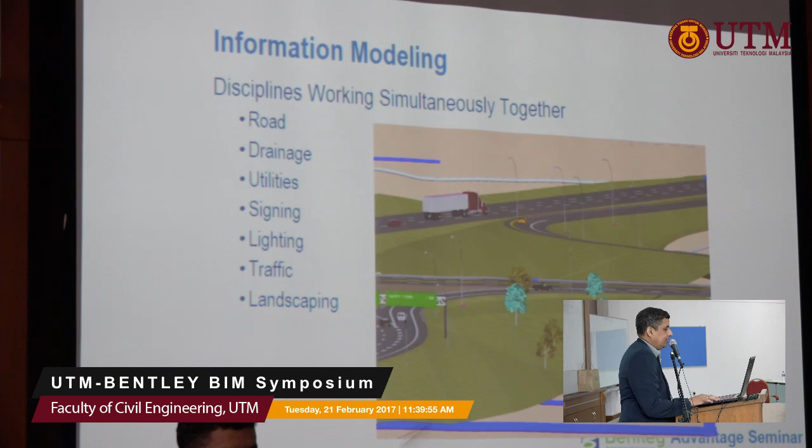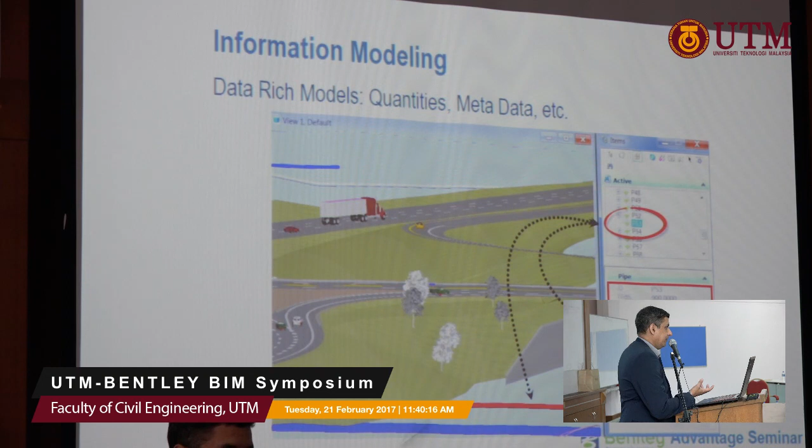So the key word that we like to talk about is information modeling. Now, when you actually look at a particular object, you have the relevant details: when is this road constructed? Who constructed it? What's the cost of that? When was this beam constructed? What is the grade of that beam? What does it use?

And the key word here is you need to collaborate everything together. BIM most of the time works with many offices, many companies, many different skill sets. Managing those requirements under BIM is also a challenge, and what we call here is collaboration. So you need to collaborate all this information when you work with BIM. In order to deliver BIM, you have the software, you have the skill set of people, and you need to manage your resources as well. So it's a whole process.

It's not only that if you know Revit, you are already BIM — no. In BIM, we have different definitions. You have a BIM drafter, that means you just draft using CAD, whatever tool, whether it's Bentley or Revit — you call that a BIM drafter.

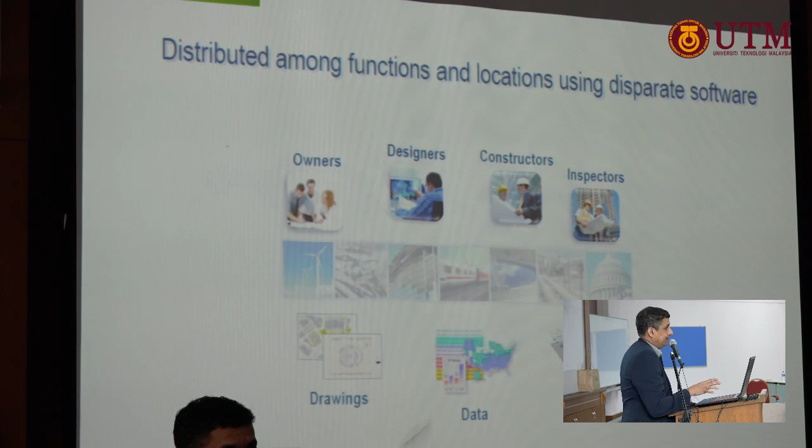So in order to actually understand BIM, you need to be part of that team. You need to be part of the workflow.

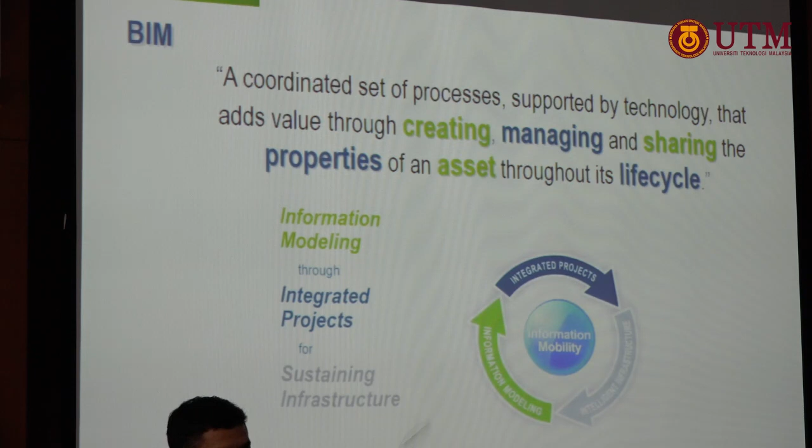So coming back to all this process I've shown you, BIM, as we understand it, is a coordinated set of processes supported by technology. Technology can be anything - it can be Bentley, it can be Revit, and so on - whereby you use the technology to create, manage, and share. That means if you're a structural guy, once you've done your sharing with the MEP and so on, the whole process is to bring it to the asset lifecycle. Who's going to use it at the end? The owner-operator. The owner-operator is going to use BIM for maintenance. That's the whole purpose of BIM.

So this is where Bentley comes in. Bentley's strength, as I said, you see at the bottom here: information modeling through integrated projects, for sustaining infrastructure. So the whole set of suites that you've seen there basically work with these three concepts.

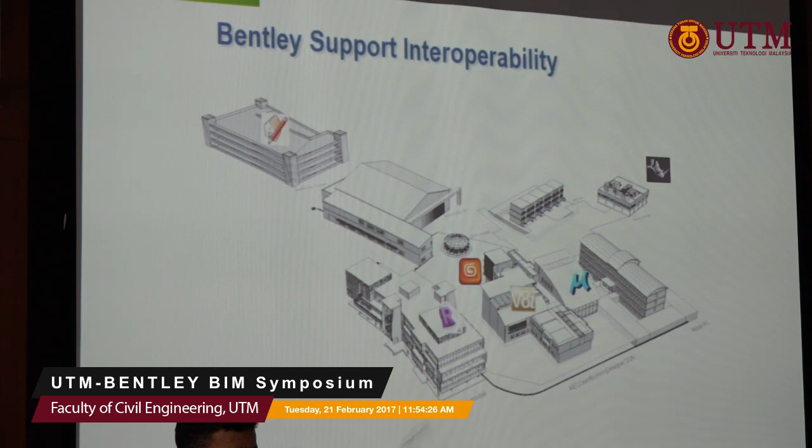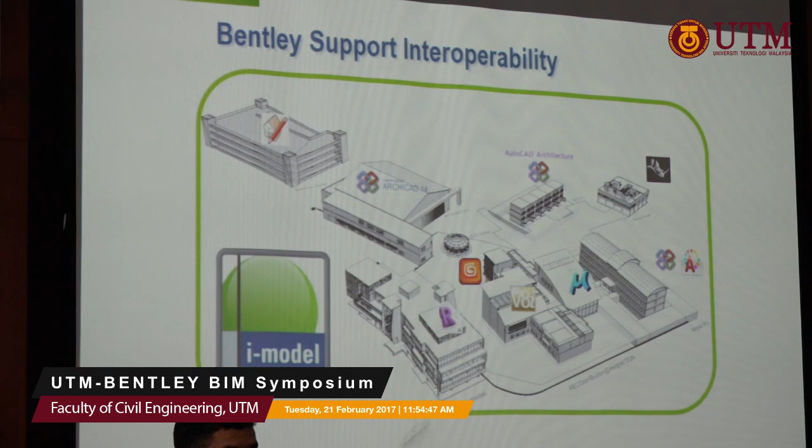Now another thing about BIM is, in industry, you're actually working with many formats. There are guys working with Revit, there are guys working with CAD, there are guys working with Bentley. So one thing about Bentley software - it is interoperable. We can work with any software that you have data in. If you have data in Revit, we can work with that, we can bring it in, not a problem. If you're working with ArchiCAD, we can bring the data in. So we work as interoperable.

Another way of working with BIM is what you'll hear called Federated Information Model. When you do BIM in a big project and put it in one single file, the size of files becomes too huge to model. Even if you want to open it in your project, it becomes too complicated. How do you expect a guy at site to open it up on an iPad to construct it? There's no way you can actually do that. So the BIM that you show is only going to be residing in the office.

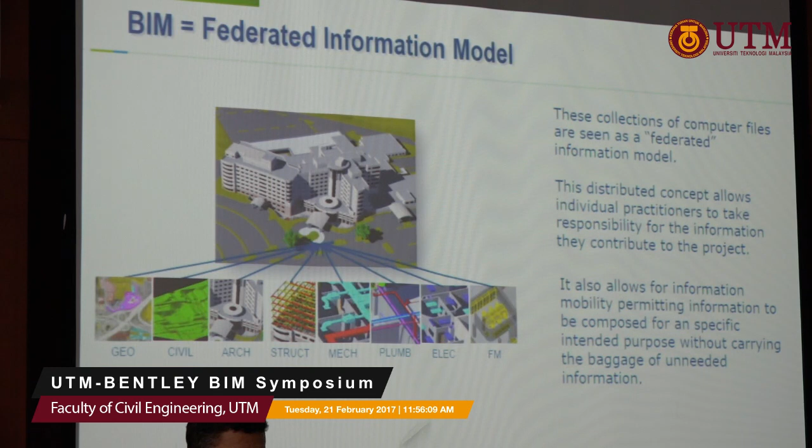So in order to overcome that, the federated approach has been recommended, whereby we reference only those information that's required to form a BIM. So if the guy is going to do structural, he just needs to get and reference and look at the structural component that he wants to construct. So it's lighter and easier to look at, but it actually consists of the whole integral project. So it's not isolated - it's still integral for the whole project, but the way it's being worked is the federated approach. And Bentley supports those kinds of workflow.

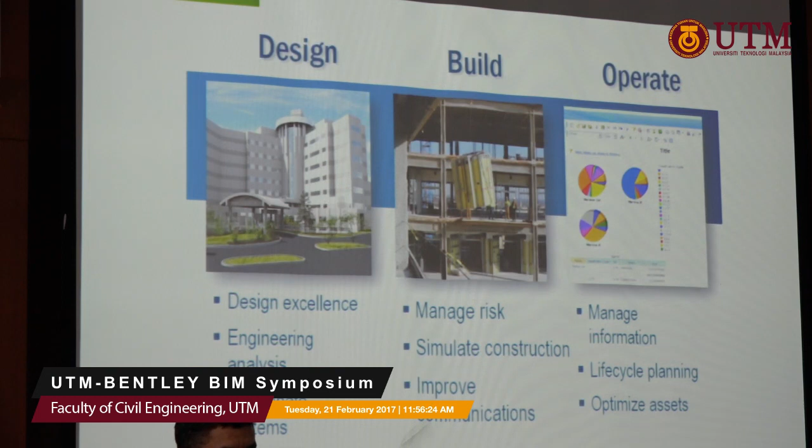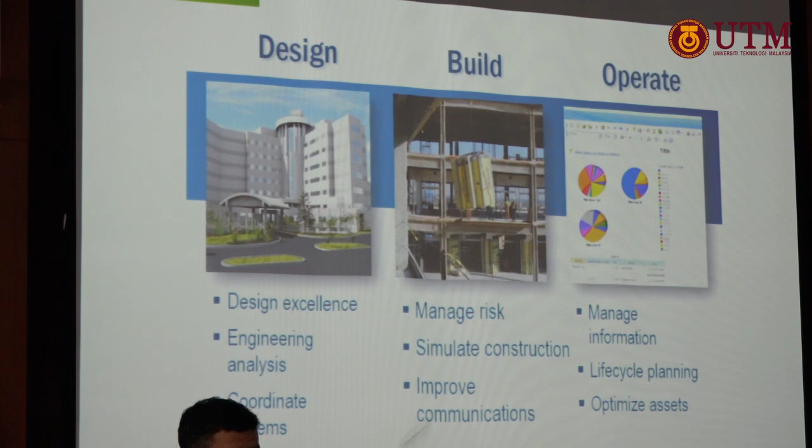Generally, if you're talking about the industry, the way the industry works, you can look into these three categories: design, build, and then operate. So these are basically where all these solutions will be playing around. Bentley covers from design to asset lifecycle, which is the operational phase. So you can see there are many Bentley software that work in all this area.

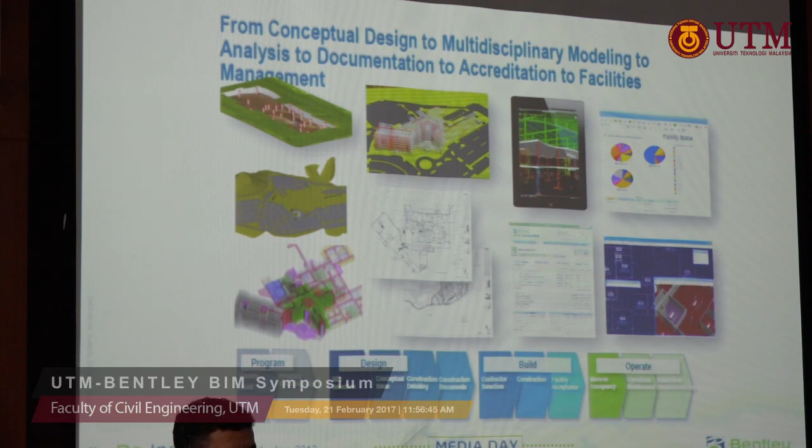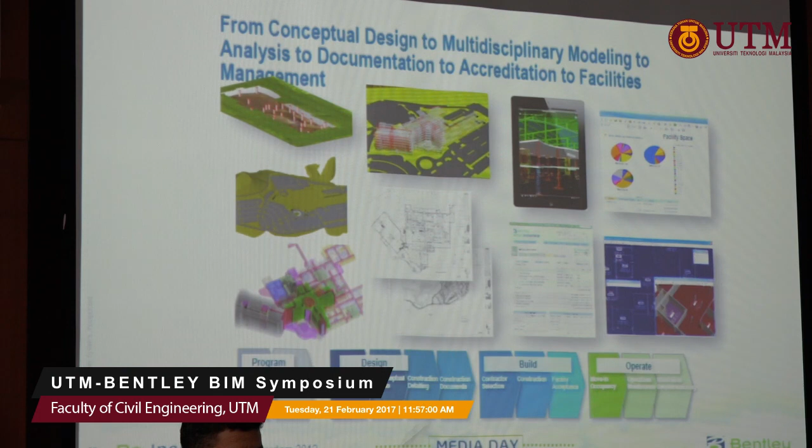So if you're going to do concept, there's a concept solution. If you're doing infra, we have what Mei Lin has shown you - what was the software for concept? Concept Station. If you're doing building, there's another software called OpenBuildings, just for concept. If you're doing detailed design, there's OpenRoads Designer, there's OpenBuildings. If you're moving to site, there's Navigator. So many software you have.

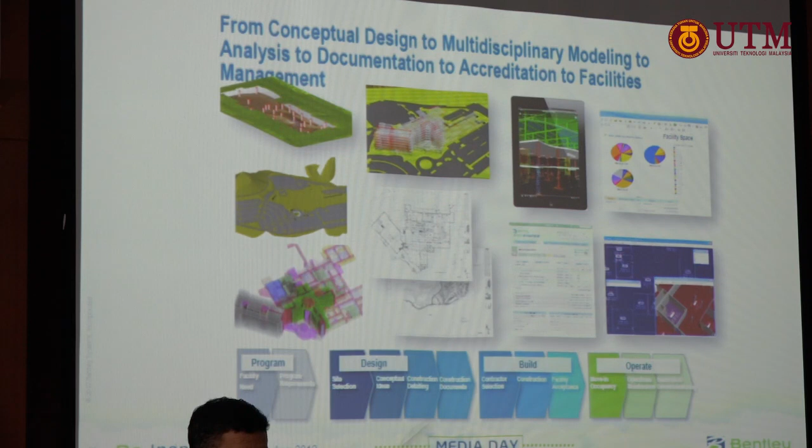So just a bunch of it - if you're doing GIS concept, we have Bentley Map, in 3D. Singapore is basically doing 3D GIS now, using our software for the whole country of Singapore. And then you have OpenRoads Designer, you have OpenBuildings. This is the first time you're hearing about Bentley OpenBuildings, which I'll share with you more later.

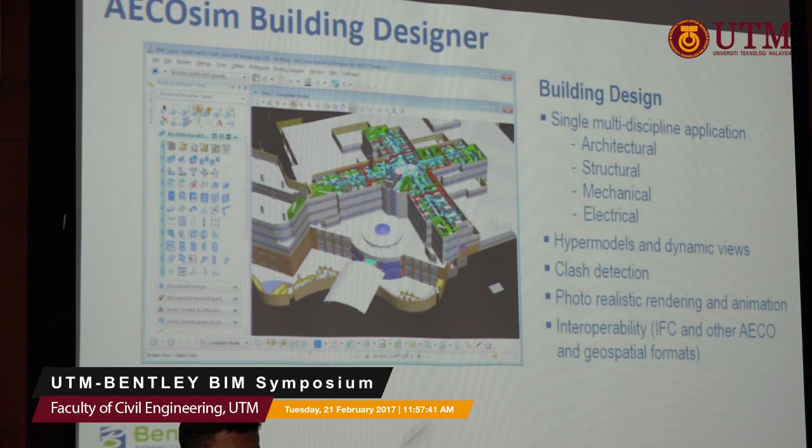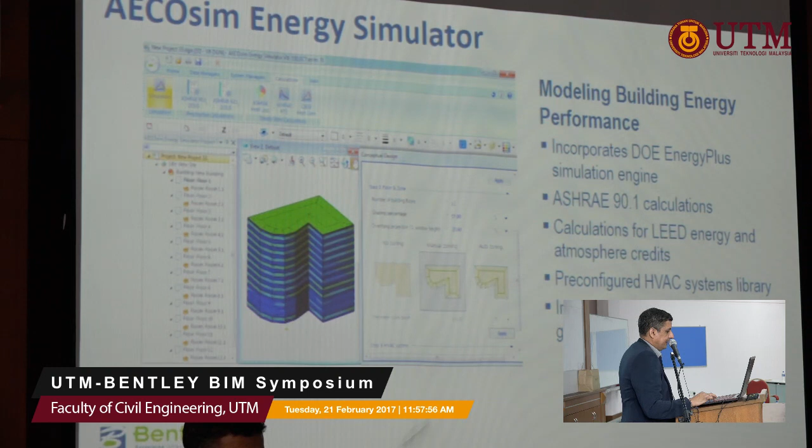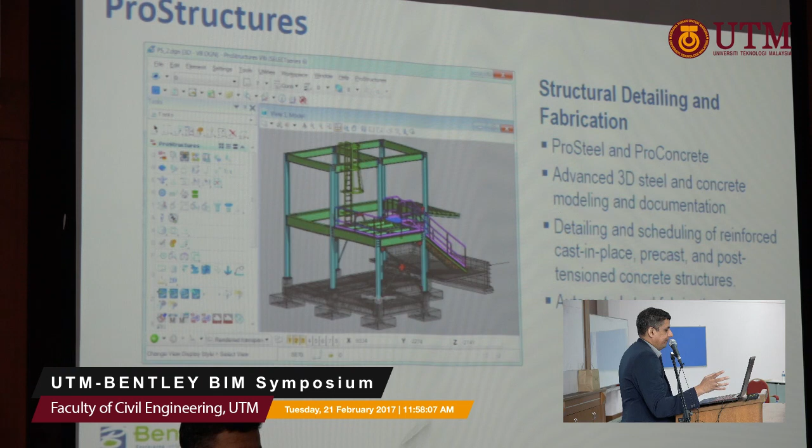Generative component, this is a very interesting option to consider what-if scenarios. You have the AECOsim green building, we call it energy simulator. You have a lot of MEP capability in here. And then you have ProStructures where you want to do detailed modeling of steel, concrete, all those things. You can actually use this kind of software to do that.

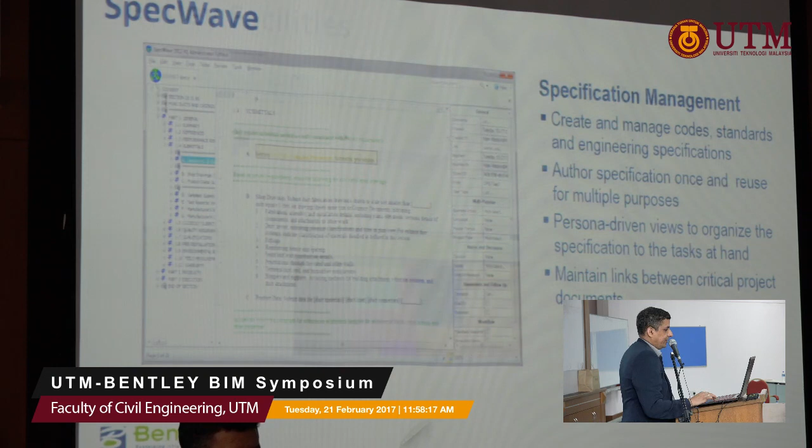An important part of BIM is also specification. Bentley SpecWave actually manages all the specification accordingly, and Bentley Facilities manages the asset lifecycle information. And Navigator, as I mentioned, you can bring it onto your mobile app, whether it's Apple or Android system.

If you go to Google Store and type Bentley, you should see Bentley Navigator app there. There are a few apps you can download and install. The model, basically, you can bring in from the desktop by using Dropbox. Bentley does have its own collaboration software, ProjectWise and all those things. Maybe you do not have access for that, but in the meantime, if you have your model on your desktop, you can bring it into your mobile by using any Dropbox capability.

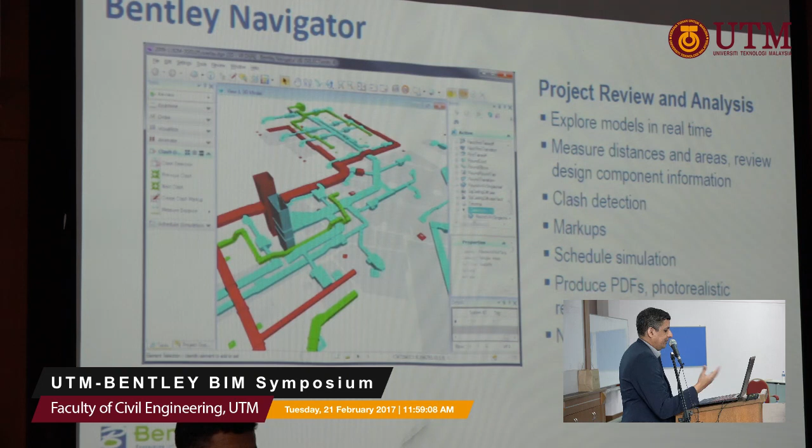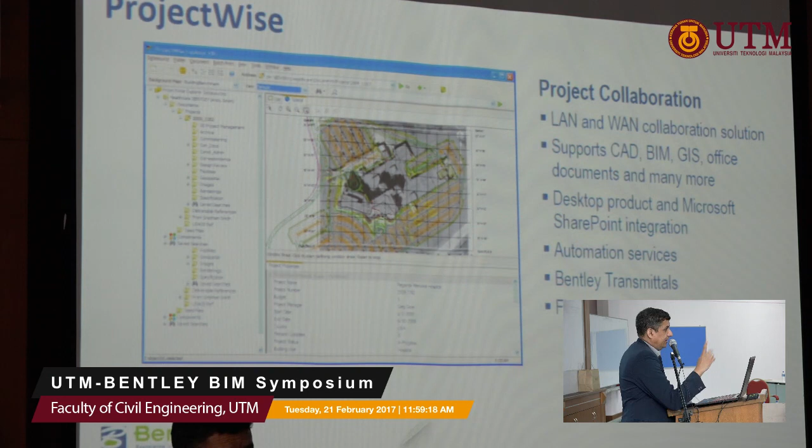And then this is ProjectWise, one of the main software used to collaborate. The MRT Corp, MRT project that you're seeing, they are basically residing on ProjectWise.

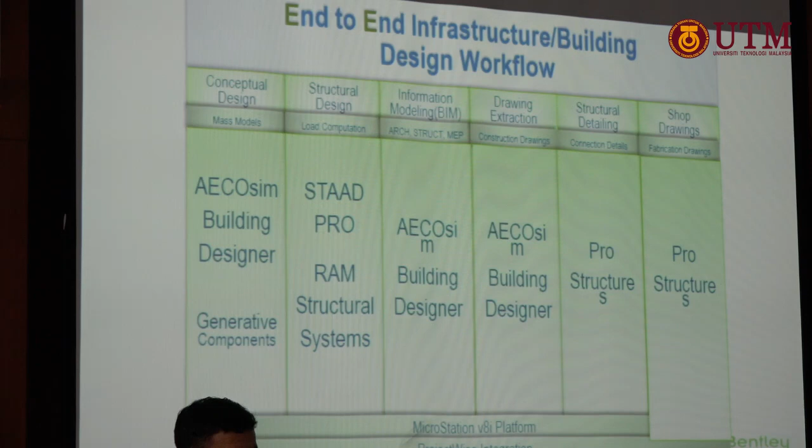Now, if you look at design construction for a typical building, in terms of Bentley solutions, you have AECOsim, which builds up your building information. So you get some structural software, STAAD. Have you used STAAD before? STAAD Pro? So you're already on Bentley.

Unknowingly, you are using Bentley software. STAAD Pro is already part of Bentley, it's been there for a long time. You may not know the brand. STAAD Pro is used for the analysis in AECOsim, so you can integrate all those things. AECOsim is the BIM software under Bentley, and then you follow up with Pro Structures, which is used to do the concrete and steel detailing and information.

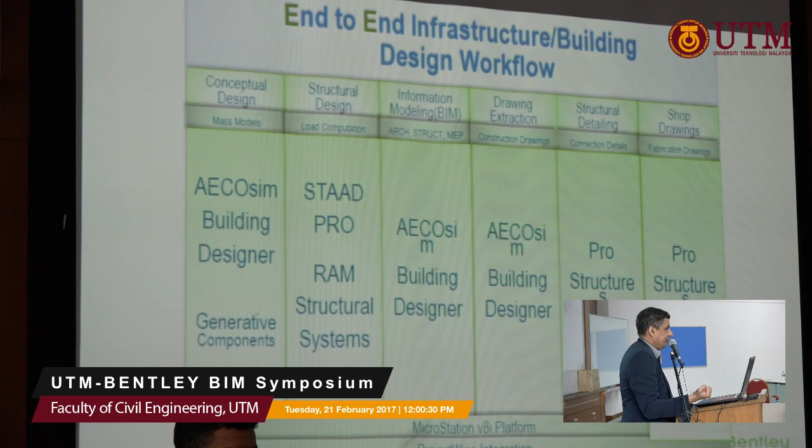This is a typical workflow if you are doing buildings. And at the bottom is ProjectWise, which will integrate all this information. Whether you are in the same office, same campus, or a different campus, different state, ProjectWise will integrate all this information together.

So multidiscipline building documentation, this is where AECOsim actually resides for Bentley. Whether it's site, utility, roads, architecture, MEP, and many things, even tunnels, is done in AECOsim. AECOsim is not only for building, it is for any infrastructure projects that you want to do.

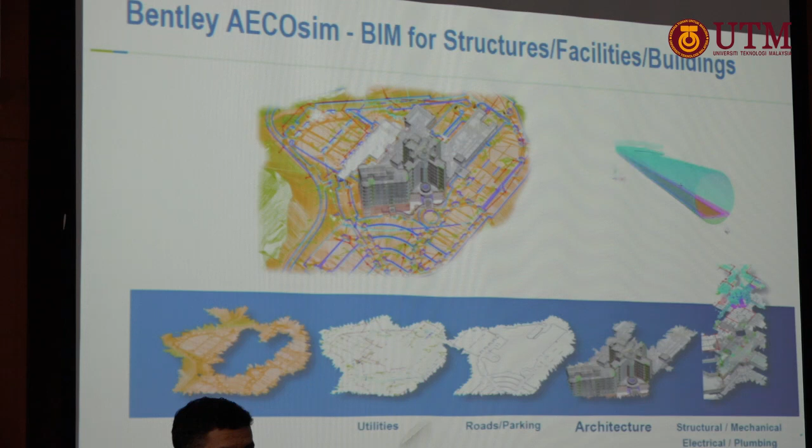I understand that if you're talking about Revit, a lot of people know how to use Revit. It's straightforward building information. But if you're going to do horizontally spread building, AECOsim provides much more versatility in that. If you're going to do geocoding, geographic information, one thing Revit can't do is geographic locations. AECOsim does that easily, and many other things too. That's why it's being used widely in infrastructure projects compared to just buildings.

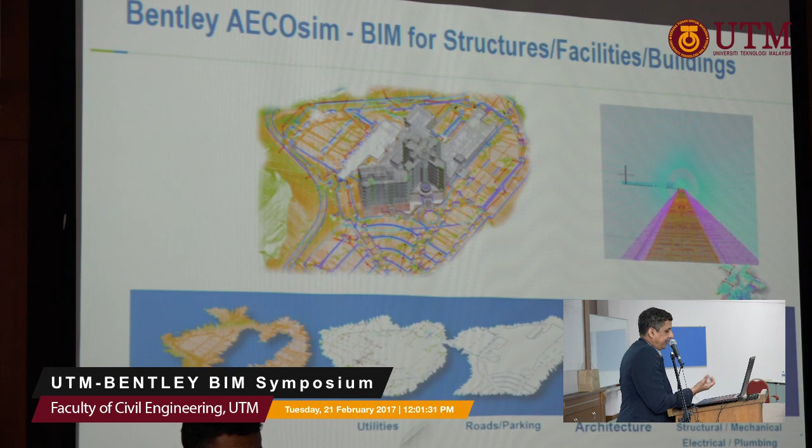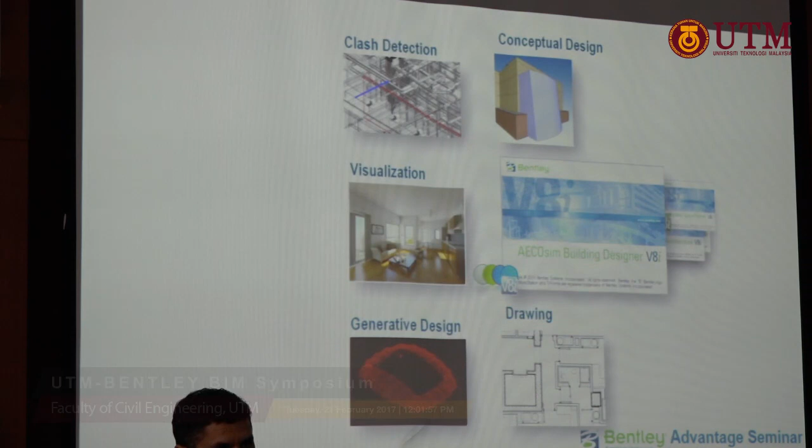Widespread usage of BIM for Bentley. AECOsim brand starts from architecture, engineering, construction, operations, simulation. That's where AECOsim comes in, and it's just one solution. You have the mechanical, electrical, everything in one, from concept to complete drawing production.

So when you're talking about data integration, it's easier, and it resides on MicroStation. MicroStation is the CAD, so it's easier for you to manage this information as well.

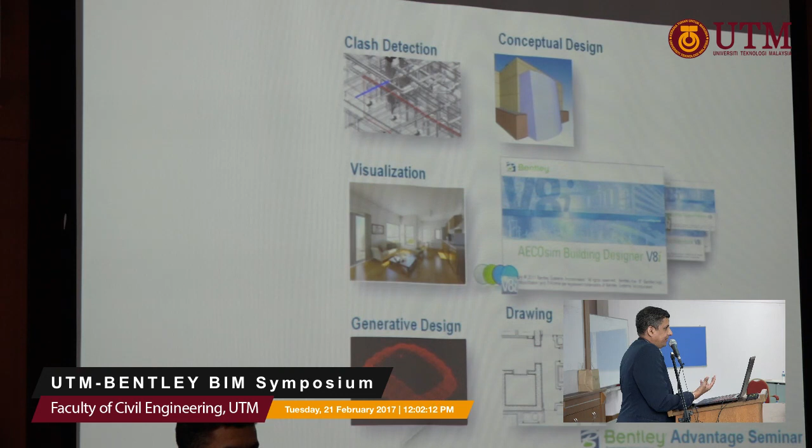So you have all this information, you can actually do coordination, clash analysis. Basically, the key important thing about building is once you do that, you need to do clash coordination, everything. AECOsim does that quite easily. If visualization is important, fine, you can actually produce great visualization from AECOsim as well.

And then you come and produce all this detailing, produce the analysis. Analysis can be done using STAAD Pro. So from AECOsim, it goes to STAAD Pro. Whatever model you have done in AECOsim, it goes to STAAD Pro. You can analyze that, optimize that, and then update that information in AECOsim.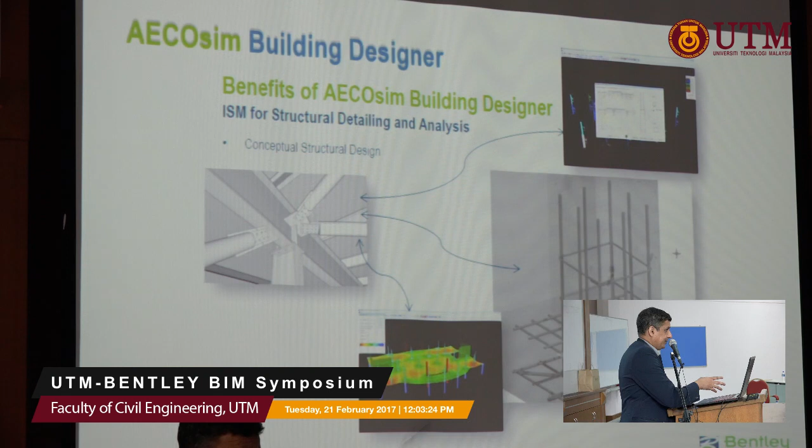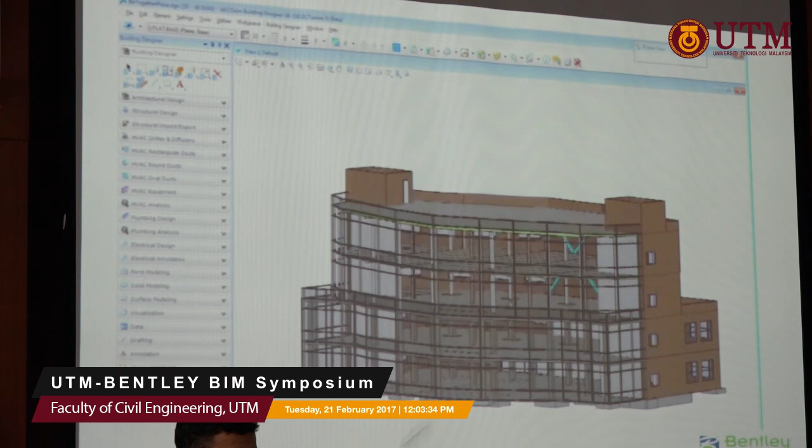All right, this is just a short video showing you the model of the software in AECOsim, showing how the information is being transferred.

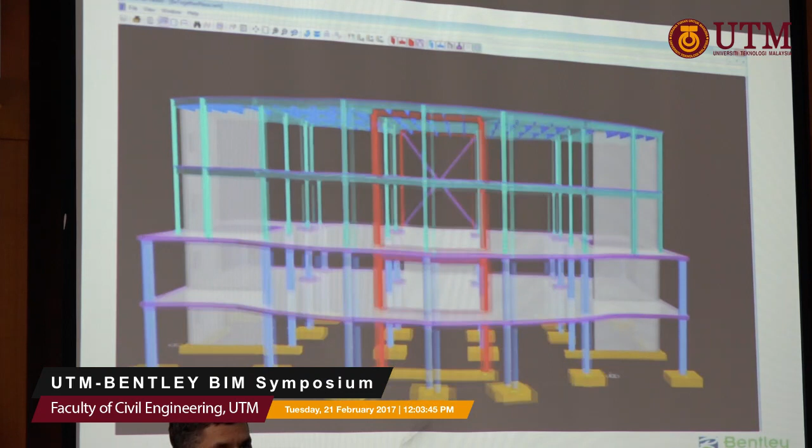Now, another software you should be familiar with is RAM Structural Concept. It's also part of Bentley, and you should have access if you're doing post-tension buildings and all those things. RAM will be another software in addition to STAAD.Pro that's good for you to understand. It's used quite a lot in the industry, but its strength is basically in post-tension building design.

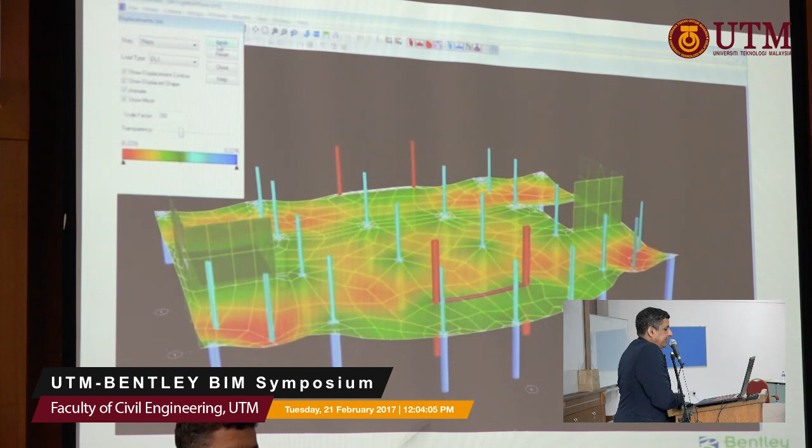So what you see here is basically doing the analysis, finite element assessment on the floors. You can come up with detailing, and then bring it back to AECOsim.

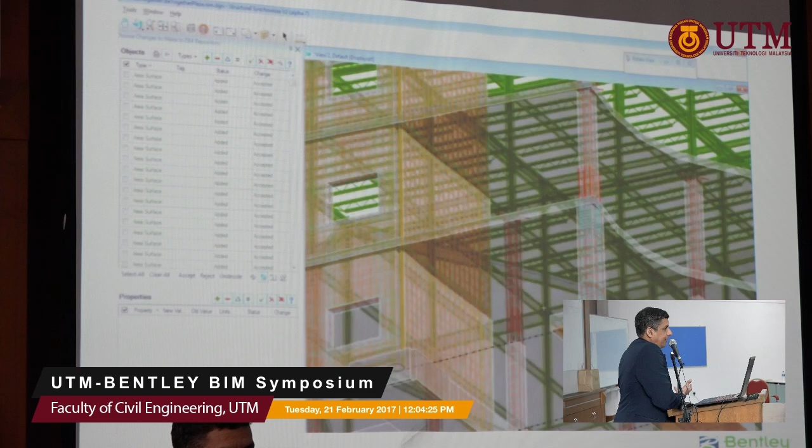And then you have all this reinforcement information created in AECOsim automatically, so you do not need to create it manually. Creating reinforcement is a challenge - if you're going to draw each reinforcement in a beam, it's going to take a long time. By using this integrated approach, it's easier to do that. So everything is in one environment, called AECOsim.

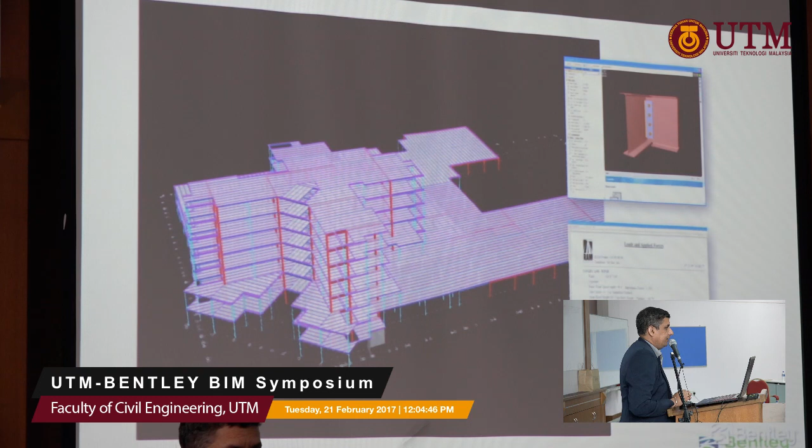Plus steel connection design as well. If you're doing steel, all the connection design you can actually produce in AECOsim.

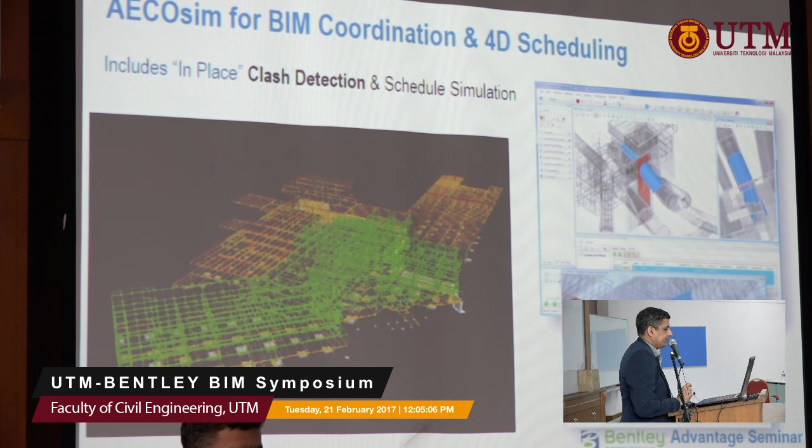So another important part of AECOsim is BIM coordination and 4D scheduling. You can schedule that information in AECOsim by linking it to project scheduling, whether it's Microsoft Project or Primavera - whatever, you can do that in AECOsim. And again, moving to clash.

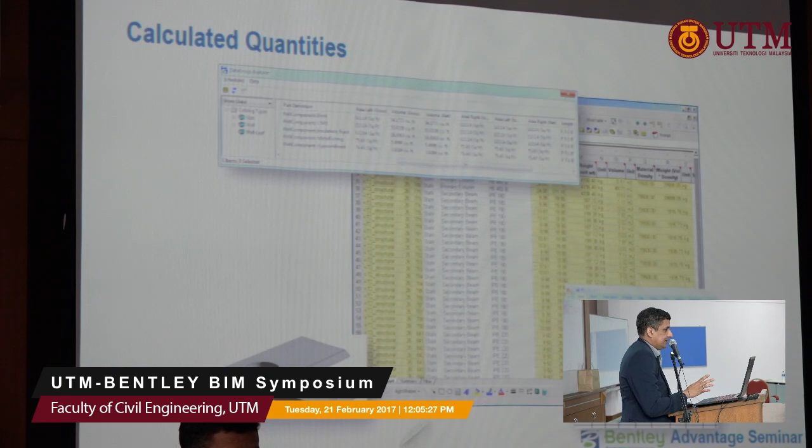Another important thing about Bentley software is hypermodeling. Hypermodeling is good software whereby you can represent 3D information and 2D drawings in 3D space - it's easier. And then you have all the quantities and all the stuff.

And you have MEP, the HVAC system - you can model that accordingly.

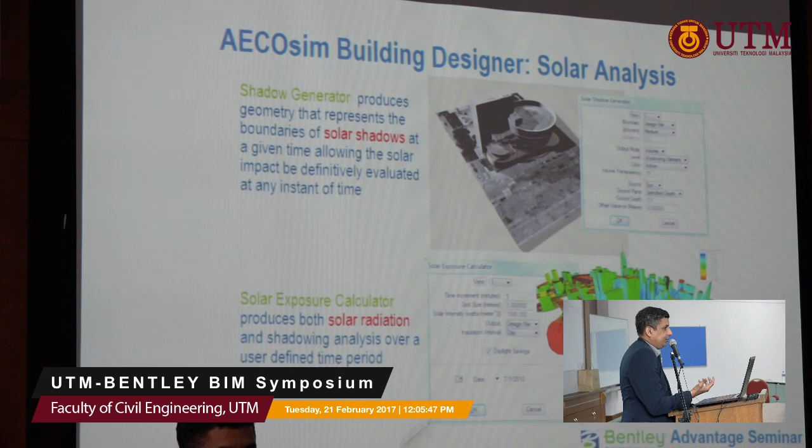Now, if you're going into green building - green building has become one of the important aspects of building design, and AECOsim provides the capability to do green building analysis. So a simple analysis like solar shadow and solar exposure, you can actually do everything in AECOsim.

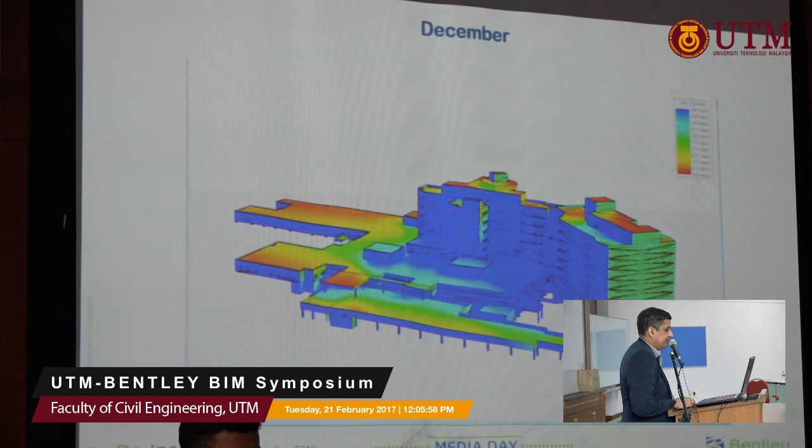So you can actually see when this information is building - you have different levels of exposure, and you can do that.

AECOsim, as I said, consists of many capabilities. One of the capabilities is point cloud. Have you heard of point cloud before? No? All right, it's a different type of survey.

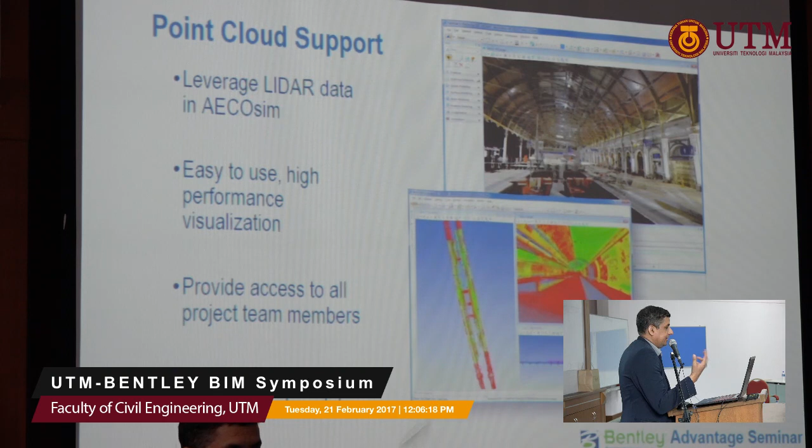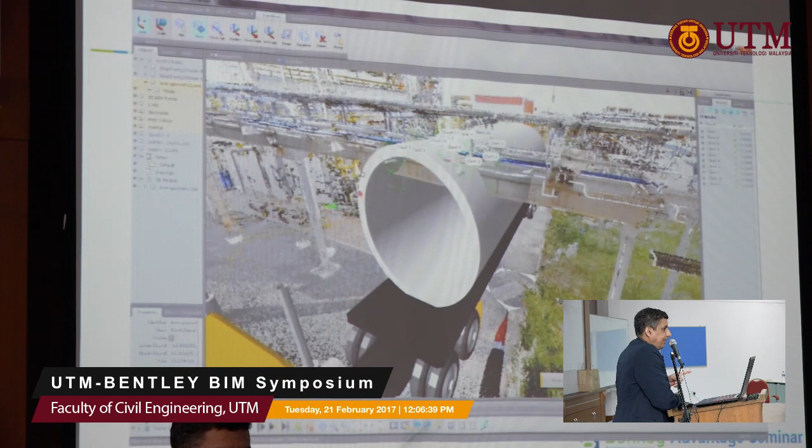I'm just showing you this video here - you can see this is a survey of points in a building. So if it's an existing building, for you to go and create a BIM model becomes a challenge. So you have a laser scanner that shoots up millions of points and measures the exact location where the component is located, and then you can create a feature of your objects.

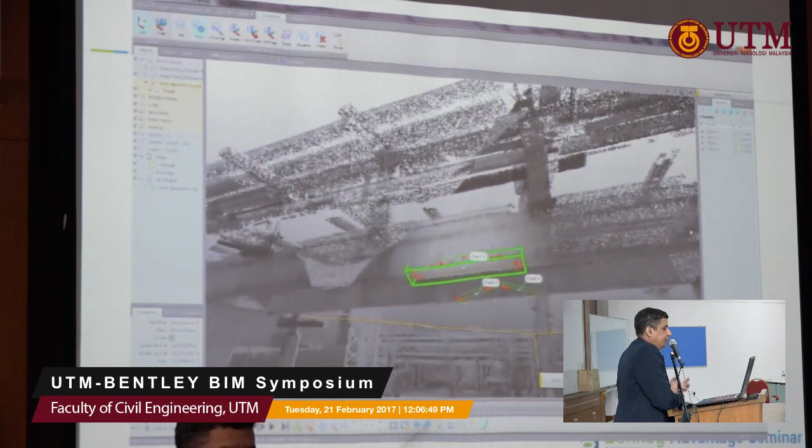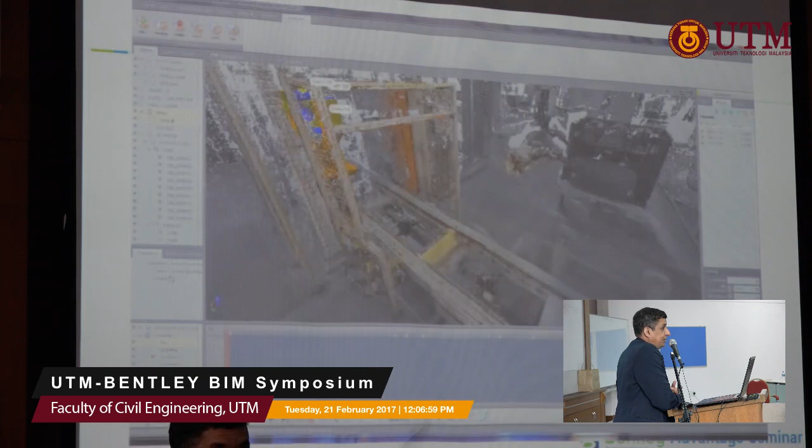It's being used quite widely in buildings, oil and gas companies. So instead of you going there to measure, point cloud takes much shorter time for creating a BIM model out of that. And then you can perform any kind of clash detection with the point cloud as well.

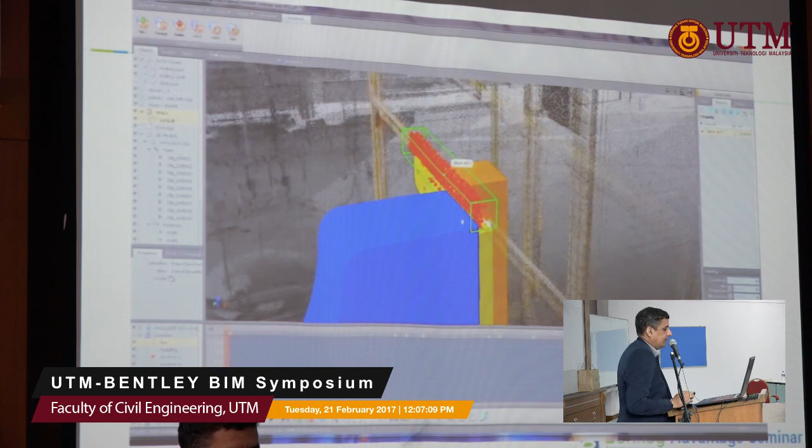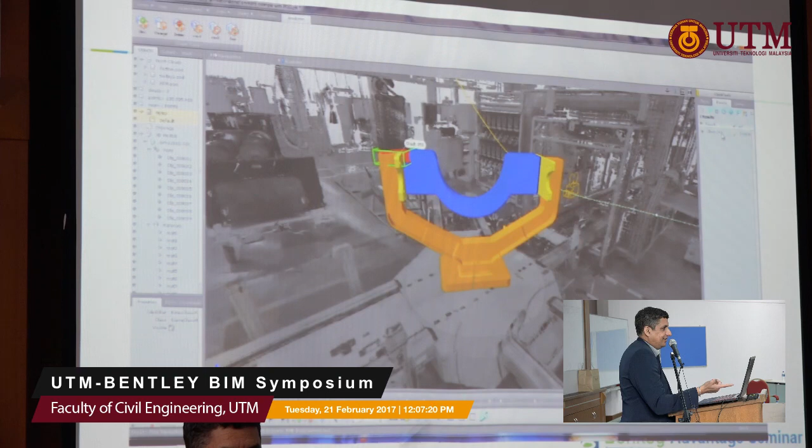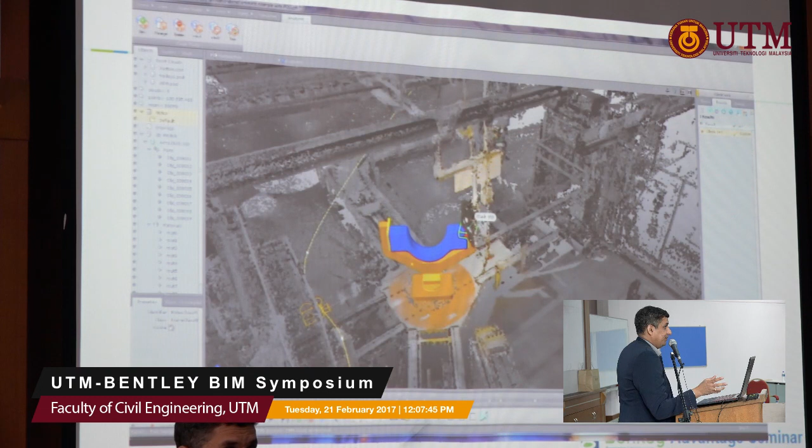So technology has moved forward. Earlier you have this conventional survey, then you have LiDAR, then point cloud, and now another term being used - context capture - whereby converting 2D photographs to 3D. That kind of concept is also being used in survey now, because you can get an accuracy of plus minus less than 3 centimeters. So it's quite good for initial purposes, but you can improve that to plus minus 1mm if you need to by incorporating some point cloud data together.

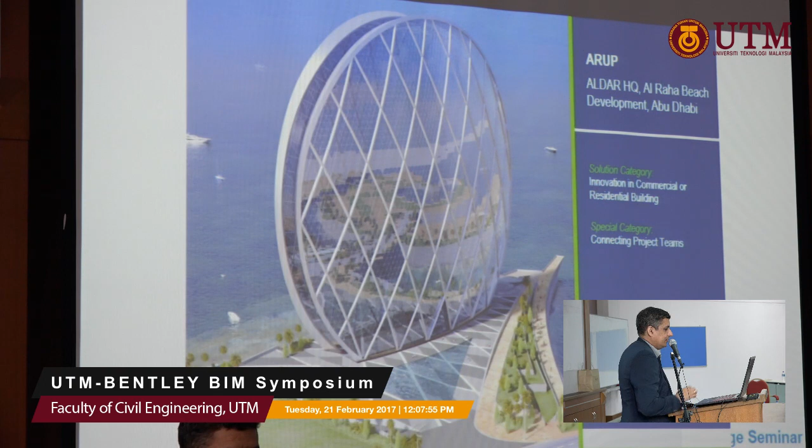So some projects being done overseas, that's kind of motivation for you. This is Arup's projects in Abu Dhabi - they are very innovative in their ideas. There are many projects being done overseas using Bentley software. This is the Ferrari-inspired theme amusement park.

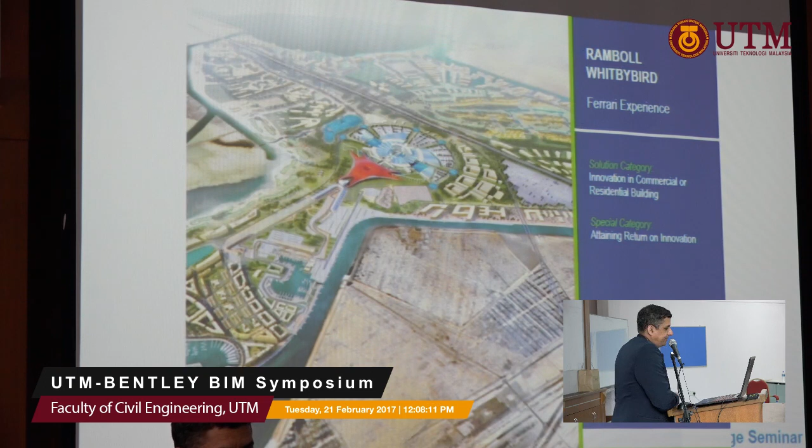So buildings being done by using AECOsim. If you go to YouTube, you can actually see all these case studies - there are many case studies being done.

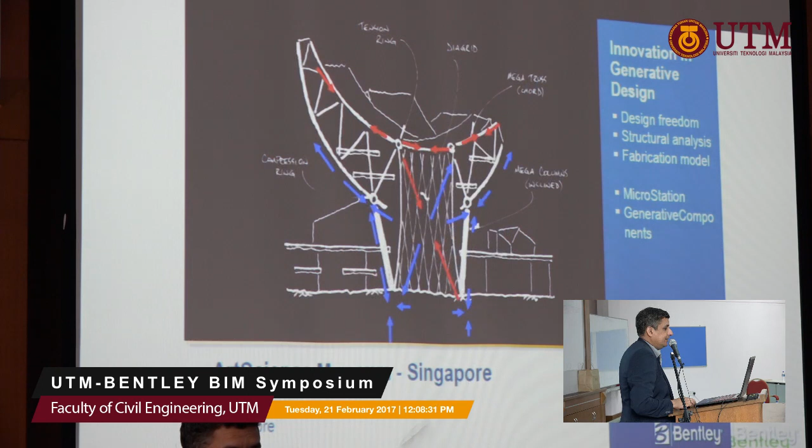Singapore, you should see that as well. It's also done in Bentley, but nobody knows that - it's been done in Bentley software as well. Construction and implementation.

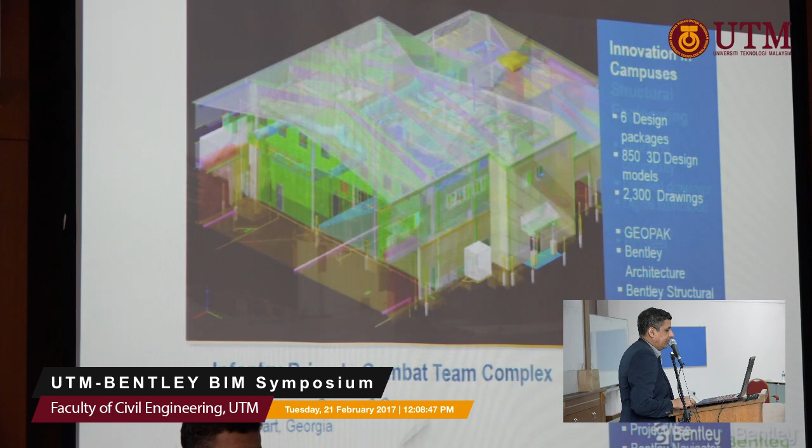And as I said, utilities - again, these are BIM projects being done overseas. So there's a lot of information that you can actually do.

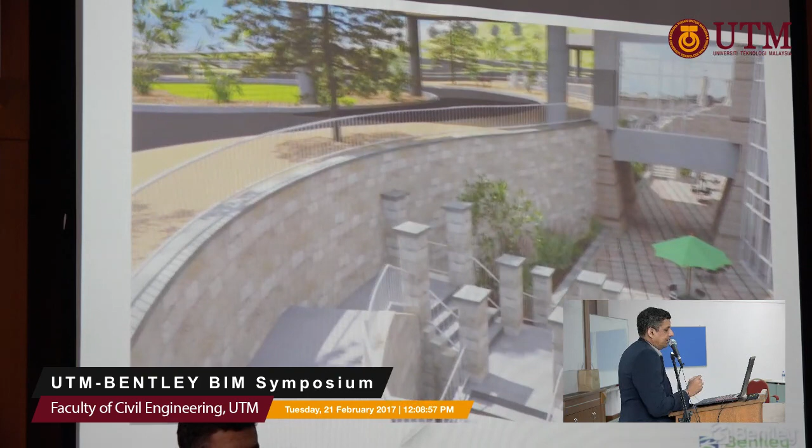Now, if you're interested to look at the final output, AECOsim does provide this information as well directly. You can do visualization, animation, all those things from AECOsim itself, without using any other tool.

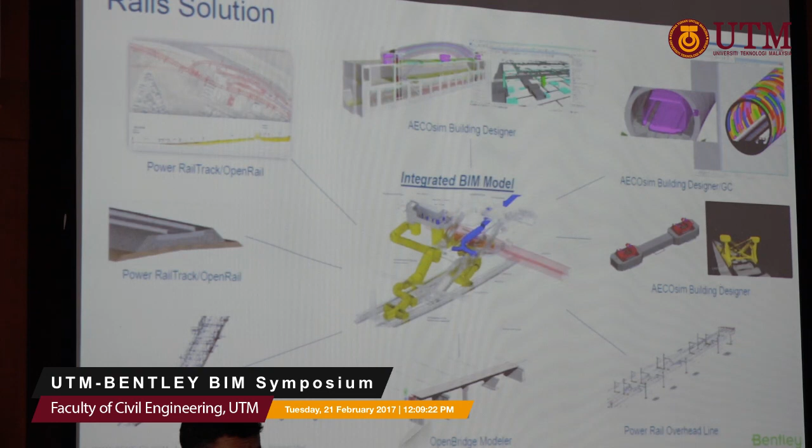Now, as my colleague has shown you, Bentley is not only that, you can actually incorporate it in the system. So AECOsim as well works in that area. As I said, if you're doing tunnels, if you're doing substations, AECOsim does play an important role in that area.

So all this tunnel information, the fixing, the attachment, the MEP component is all done in AECOsim. Similar to the tunnel in KL, it's being done in AECOsim, as well as 3D utilities, so you can manage all those 3D utilities accordingly.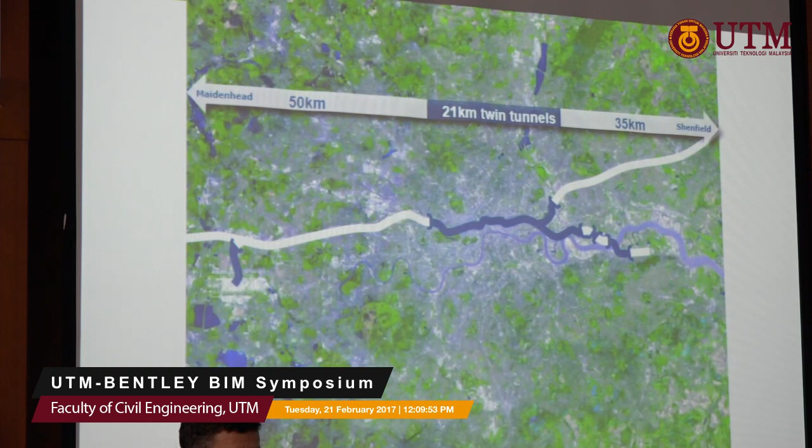One of the big projects we did was in London. So you should know the Crossrail information, done in a 21-kilometer twin tunnel. So it's also done by using Bentley solution.

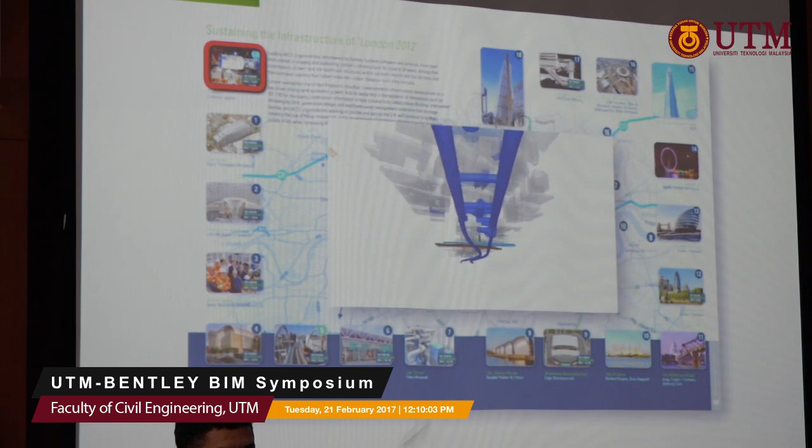Of course, Crossrail is a very complicated process. There are over 100 companies involved, and integrating all these things together is a challenge. So that is a very big BIM challenge, and Bentley plays the most dominant role in that area.

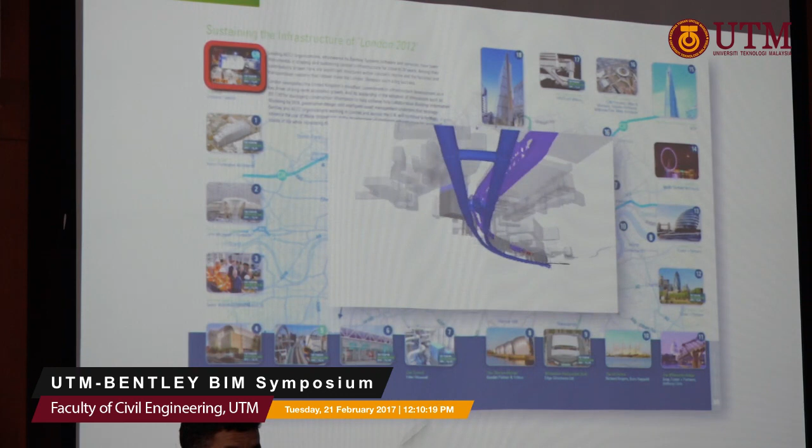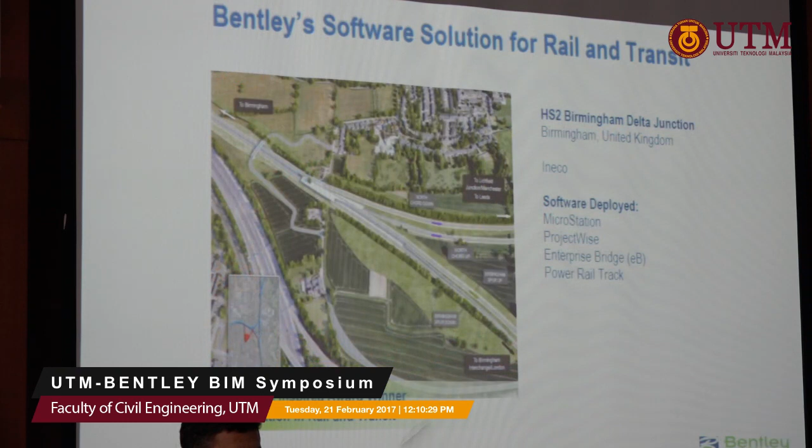Again, if you read about Crossrail, you also understand the software being used for that project. So there are many projects, whether it's road or rail, where Bentley has actually played an important role.

As Meilin had mentioned, there's going to be, this is something I would recommend if you have time, to be there in Singapore. This is the first time actually they're having it in Singapore, in Asia.

A lot of the time we have what we call a global conference where users come down to that location. It's always done in UK. This is the first time they're doing it in Singapore.

If you have time, I would say make time to attend that. You will basically meet up with all the international users, all international companies. You also get to understand the key guys from Bentley and solution providers who will talk about actual case studies, how to implement, basically exposing you to where Bentley is in terms of product. So it's a good opportunity.

Now, another key important thing when it comes to BIM is, it's not only the design you do in an office, you need to bring the design to site. If you can't bring your information to site to be constructed, then the purpose of BIM is just for coordination, it's not going to be used for construction or asset life cycle. So it's very important to look into those areas as well.

So Bentley actually provides ProjectWise to help you do that. It's being used quite widely in the industry. So information mobility is important, that's the reason why I said a federated approach actually helps in transferring information to mobility.

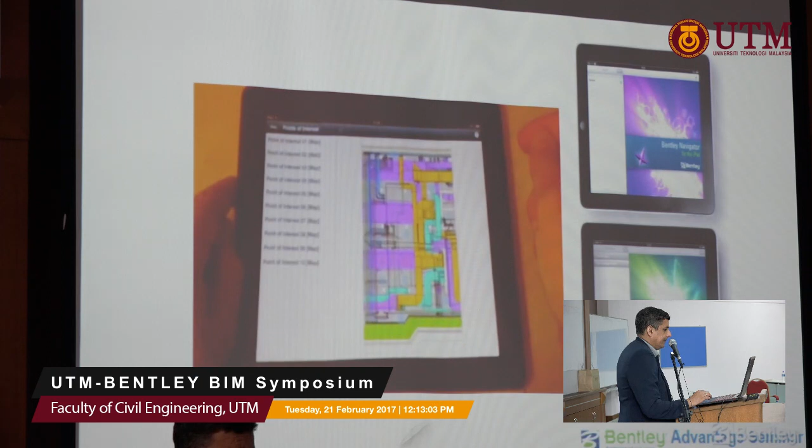So you have all this information, you can bring it onto your iPad and do any kind of clouding, and you can actually share that back with your design office. So you can put comments and all those things directly into your system.

So the model can be transferred, as I mentioned, using Dropbox or whatever. It can be shared back to your office through Dropbox if you need to, but the keyword we use is Bentley ProjectWise to do that.

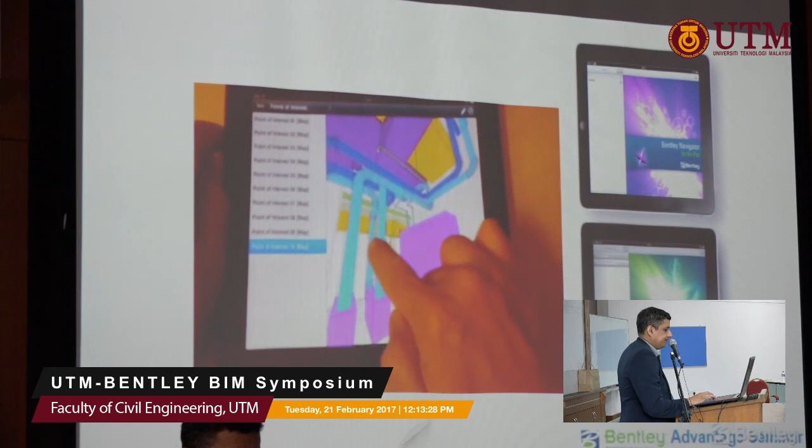Now, this is what I'm saying, we have a simple example here: a person who actually has a mobile, and a person who's on desktop. So Bentley can actually connect them together.

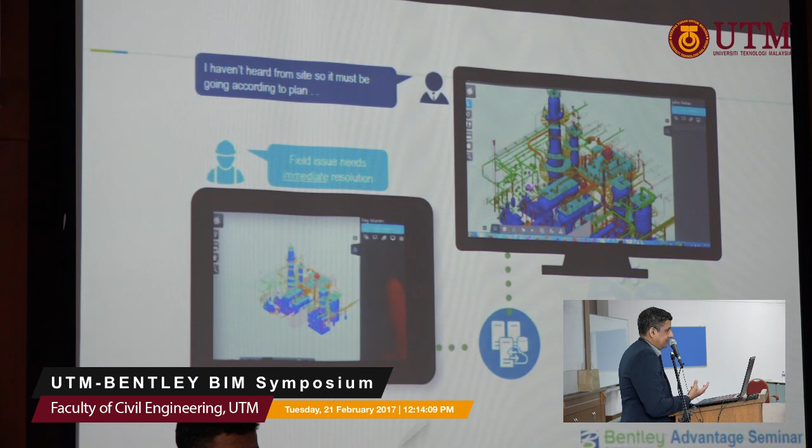The person in the design office is able to view the same model as compared to the guy viewing the model on site. And you can actually chat with the guy in the office and provide any comment that you need. So those are information that you need to integrate when you're actually moving to construction — information mobility.

Another important thing about Bentley is, in addition to hypermodeling, we can actually do augmented reality. Now we're talking about VR, virtual reality, bringing it to site. Bentley is moving forward with augmented reality, meaning we can bring your design and relate it to your site information. So you can actually see what's happening.

So if you see what's being done here, the model has been broken down, and you can check it with your design. How does your design concept look, maybe there are changes you want to do to the building. So when you click on that building, you can actually have the actual model displayed in relation to the building space.

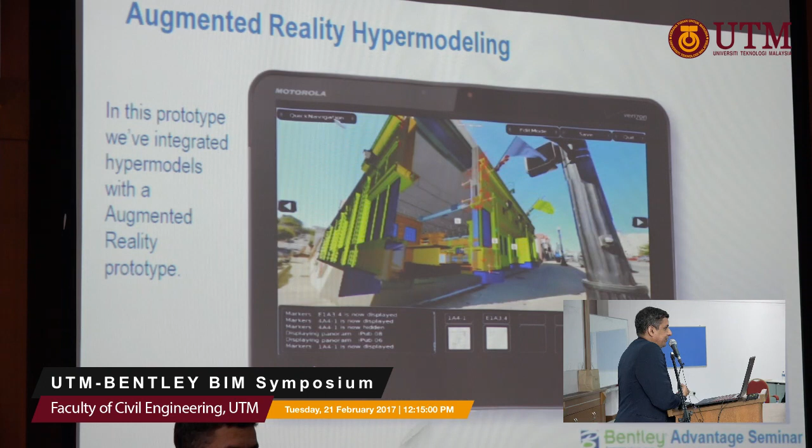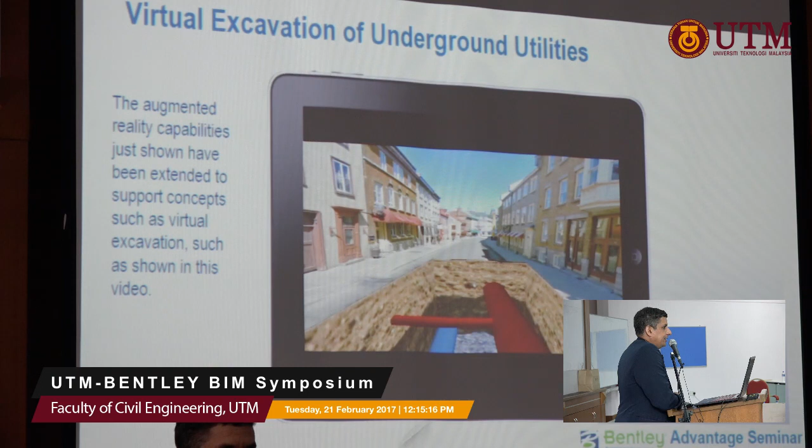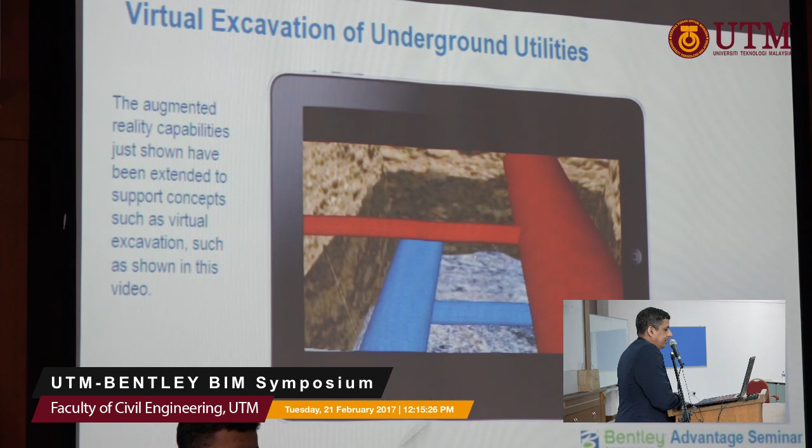Similarly with site, underground utilities. If you bring your underground utilities, you can actually see what's happening underground. Bentley can do all those things for you by being more mobile and looking at new technologies as they come. Bentley is completely integrated into those directions.

So reality model, you have seen most of this information, you can actually do that. You don't need any expert skills. LumenRT takes about half an hour for you guys to learn. Reality model just uses the camera, you can do it. There's no special skills required. You can produce this in about an hour, not a problem.

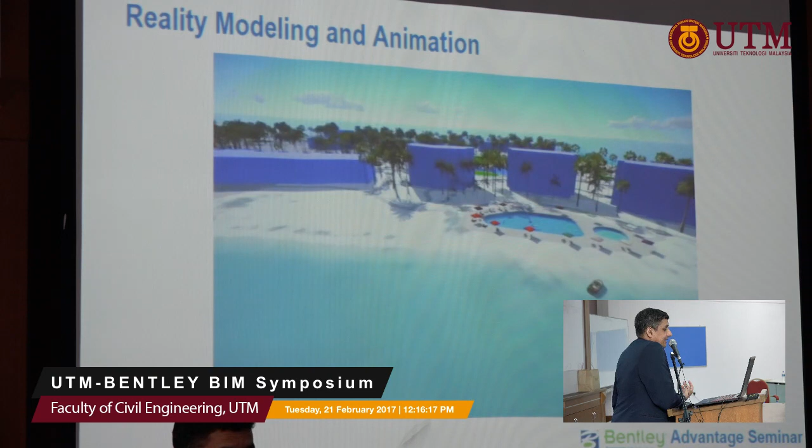So the information is there, but the key word you're going to look at is BIM. Those are nice information, but it may not reflect BIM. It's just to look at your final design, final presentation. It's good to actually sell the idea. But in order to bring this, you need to be in an integrated process, in a BIM process.

So the whole purpose of BIM is basically to reduce costs and be more efficient, and to bring it to asset lifecycle. Bentley is actually able to help you there.

So don't look at just desktop software. Bentley has quite a lot of software. You do not need to know all the software. Bentley has a workflow if you're doing a project for building, so there is a workflow for that particular software. If you're doing infrastructure, there is integrated workflow software being recommended. If you're doing utilities and so on, Bentley works on workflow and recommends the best practice using Bentley software.

So a lot of this information is available for you. Go to YouTube, explore those capabilities, understand that it's all free, and now you guys have access to the Bentley website. You have access to the software, install it and use it. You're already using STAAD.Pro anyway, it's already part of Bentley software. There are many software Bentley has, I believe it shouldn't be a problem for you to adopt into your core curriculum.

So that's the end of my presentation. Thank you so much.